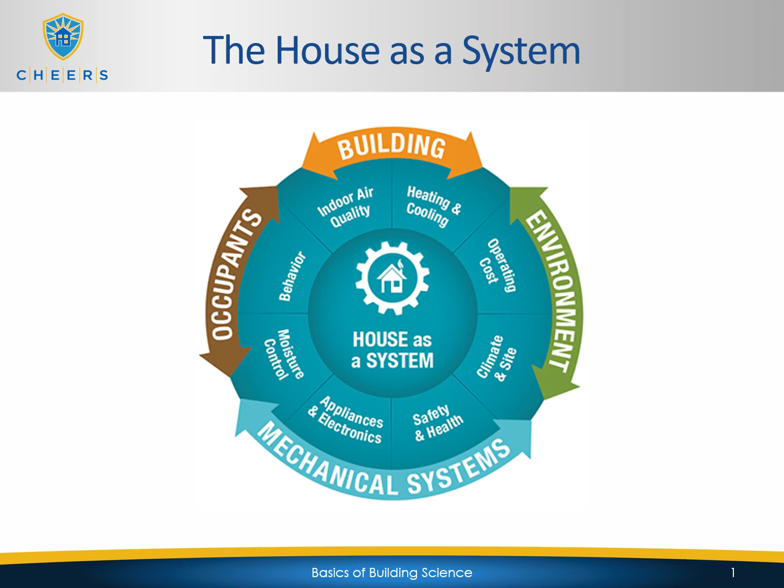And now we'll be covering the house as a system. So what is a system? A system is a set of interacting or interdependent components forming an integrated whole.

A system has three things. It has a structure, which contains parts or components that are directly or indirectly related to each other. It has a behavior, which contains processes that transform inputs into outputs. So in our particular scenario, for example, energy, right? And they have interconnectivity. So the parts and processes are connected by structural and/or behavioral relationships.

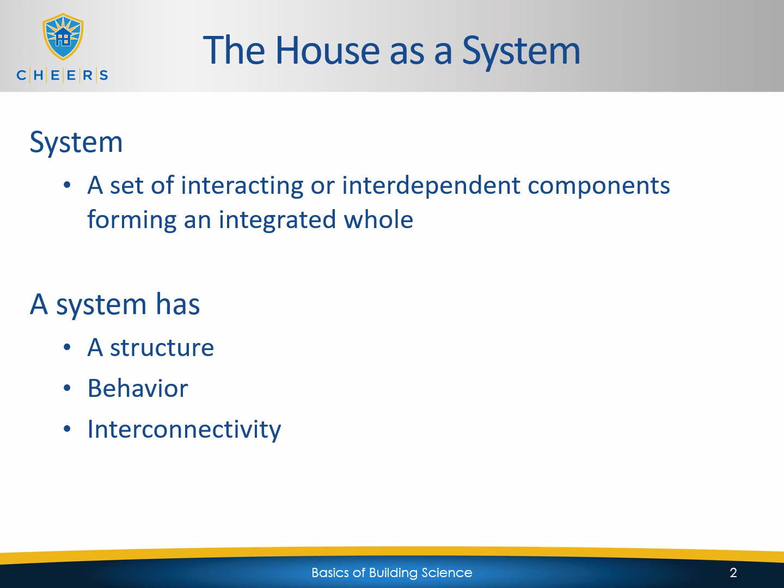So basically, each building component in a house interacts in some way with the other building components within that particular structure. So what are the building components of the house? We have the building envelope, space conditioning, lighting and appliances, mechanical ventilation, water heating and distribution, and obviously the occupants as well. Homeowner behavior will interact differently with the other components of the house and how they were built.

So the house is a system made up of interdependent parts, which I just listed a second ago. The operation of one part affects many others. So for example, the insulation and the quality of the insulation will affect how the air conditioning system works. Poor insulation will make the system work harder, for example, right? That's a very easy example. When all parts work together, the house is comfortable, safe, efficient, and durable. A house will experience problems when its components do not work in unison.

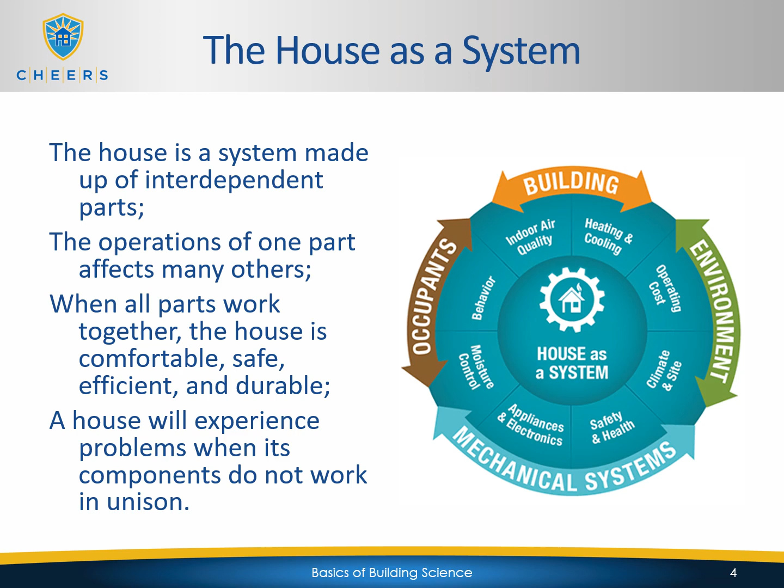So the problems that can arise from components in a house that don't work properly together can range from just high energy bills. They can result in inefficiency, discomfort, and in some scenarios can also produce life-threatening scenarios, which we'll talk about in a minute. So for example, let's talk about some interconnectivity issues, right? An attic without insulation makes the heating and cooling system work harder than necessary. This will decrease the HVAC equipment's life and cause higher than necessary energy bills.

So let's say in the winter you're heating up your house and there is no insulation in the attic. That hot air will just rise up and leak out, right? It will transfer right out. So your heating system will work probably twice as hard as it should. Therefore, your energy bill is going to be higher. The life of your equipment is not going to be as long as it should because it's going to be working much harder than it's supposed to. So that's an example of two systems not working properly together.

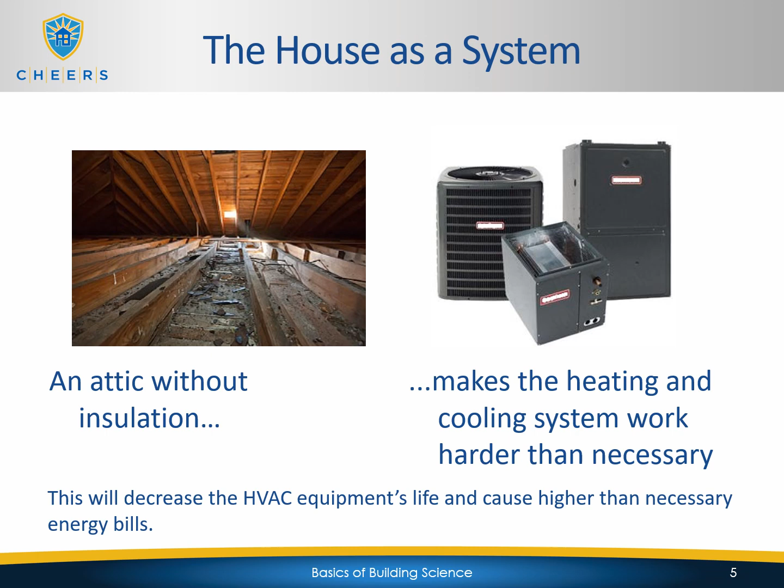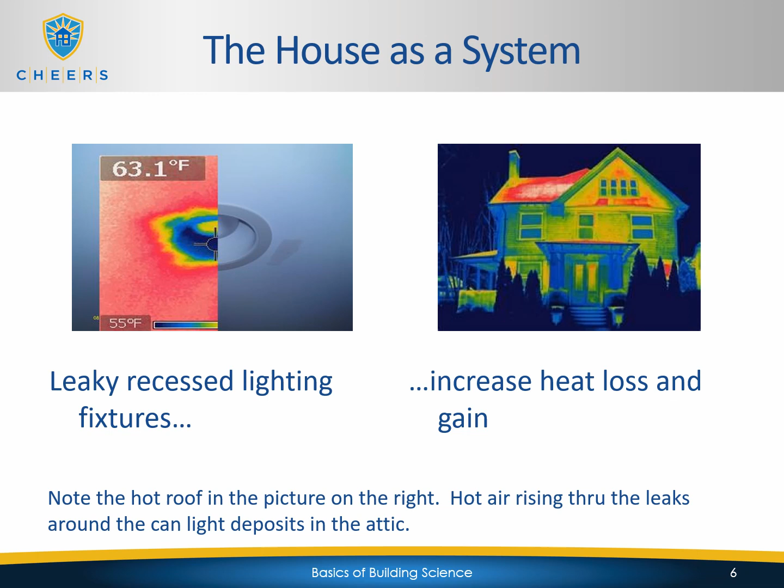This is an example of mechanical ventilation not exhausting properly to the outdoors, which can cause moisture damage to the roof deck and trusses. Moisture in this particular case will deposit and condense on the underside of the roof, causing it to rot over time. So basically, any kind of mechanical ventilation exhausting from the house needs to exhaust completely outside of the structure, not just into the attic.

So in this particular scenario, you have mechanical ventilation that's exhausting hot air from the inside of the house. Now think of the fact that the attic is going to be colder, right? So as hot air reaches the cold attic, it's going to condense and moisture is going to form in the area around that vent in the attic. And that moisture eventually is going to be absorbed by the building materials, and it's going to create rot and moisture problems down the line.

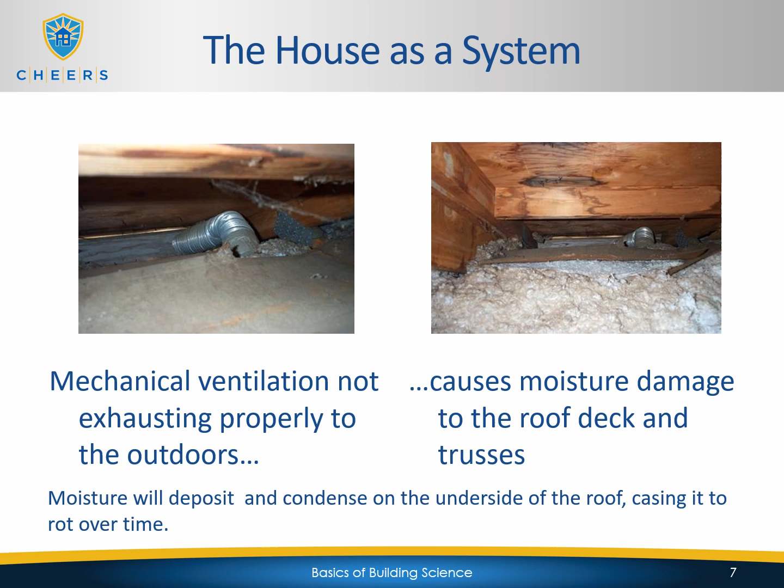So those are just examples, but basically everything in the house interacts with one another. So you can't insulate unless you air seal, right? Because air sealing is basically the pressure boundary, insulation is the thermal boundary, like we mentioned earlier. If you insulate without air sealing, you don't have the pressure boundary and thermal boundary connection, so you cannot do one without the other. You can't air seal unless you insulate.

If you stop the pressure boundary but you don't put a thermal boundary in there, now you stopped air movement, but you're not going to stop heat flow, right? You can't air seal unless you have combustion air. Combustion air is basically the air necessary for a combustion appliance to burn properly.

If you air seal but don't provide any kind of makeup air, your combustion appliances are not going to work properly, and they're going to create CO, which is a dangerous chemical, which we'll talk about in a sec. And then you have to test for combustion after you air seal.

So every time you air seal a house and you basically tighten it up, the pressure boundary of the house is now much tighter. There's the potential of a dangerous situation being created with your combustion appliances. So it's important that you test for combustion air after air sealing. So basically you have to make sure that there's enough makeup air for those combustion appliances to work properly.

Now, as you can see, everything works with one another. You cannot do each one of these things independently. You have to take everything else into account. If you don't, again, you might have energy problems, you might have comfort problems, you might create actual damage to your structure due to moisture and so forth, or you could create dangerous situations just like the production of CO, which can kill you.

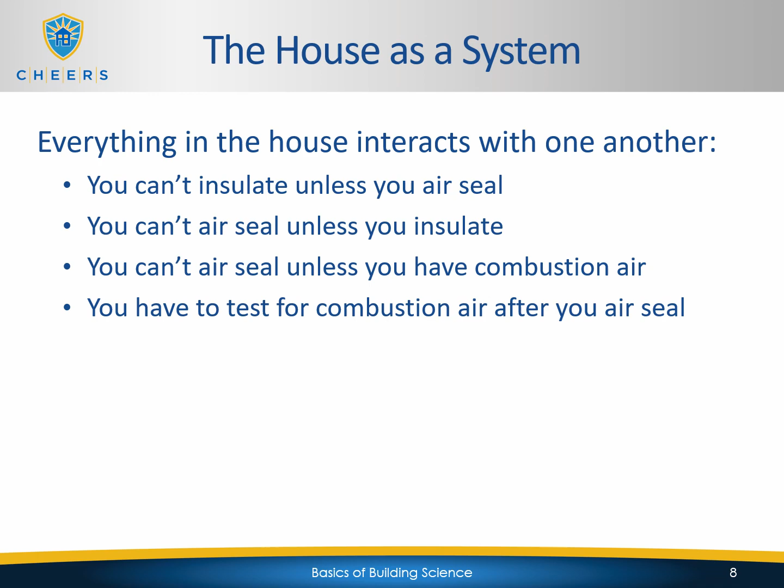So like I said, when the house does not work as a system, problems will occur. Insulating and venting the attic without air sealing could damage the roof, like we mentioned. Air sealing without insulation could cause moisture problems. Air sealing and insulating without attention to the HVAC ducts will not reduce duct leakage. So for example, you air seal and insulate your walls, but now your ducts are still leaking like a sieve. Obviously, that's still going to be very inefficient.

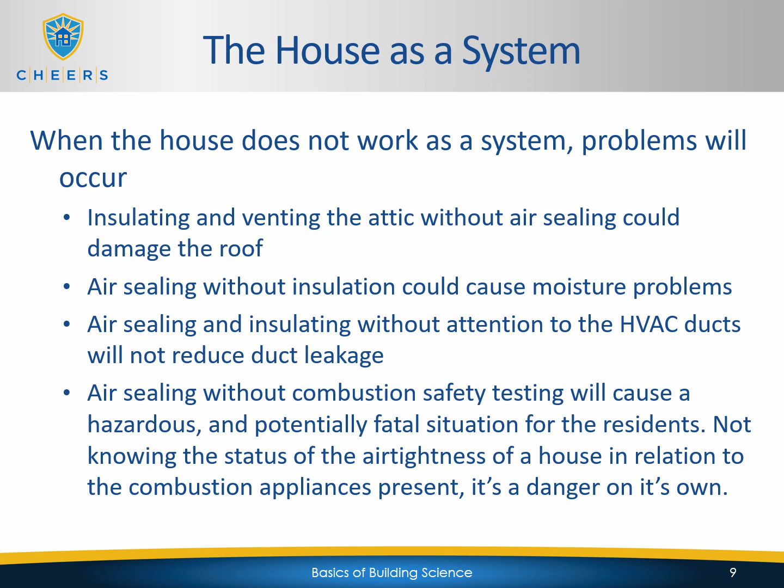And then air sealing without combustion safety testing will cause a hazardous and potentially fatal situation for the residents. Not knowing the status of the air tightness of the house in relation to the combustion appliances present is a danger on its own. So it's not necessarily that it's going to happen, but the reality is that it might happen. And not knowing whether it does or not is dangerous on its own. Anytime you air seal, you absolutely should test the house to make sure that the combustion appliances are working properly with the new air sealing.

And these are additional examples. So insulating and venting an attic without air sealing could cause moisture damage on the roof. So if you're not air sealing, it means that you're stopping heat transfer, but not air movement. So the hot air rising from the house will condense and potentially freeze on the underside of the roof, causing damage to the roof and allow moisture to fall back on the insulation and below.

So you have hot air that rises in the attic. Once it touches the cold roof deck, it condenses. Once it condenses, it might freeze depending on the temperature on the outside. Eventually, it'll melt. It'll cause damage to the roof deck, plus the moisture will fall back on the insulation. So it's a chain reaction effect that can cause multiple problems.

Also, keep in mind that the problems that you may encounter vary from climate zone to climate zone. So the problems you're going to encounter in a hot climate zone are going to be different than the problems you encounter in a cold climate zone.

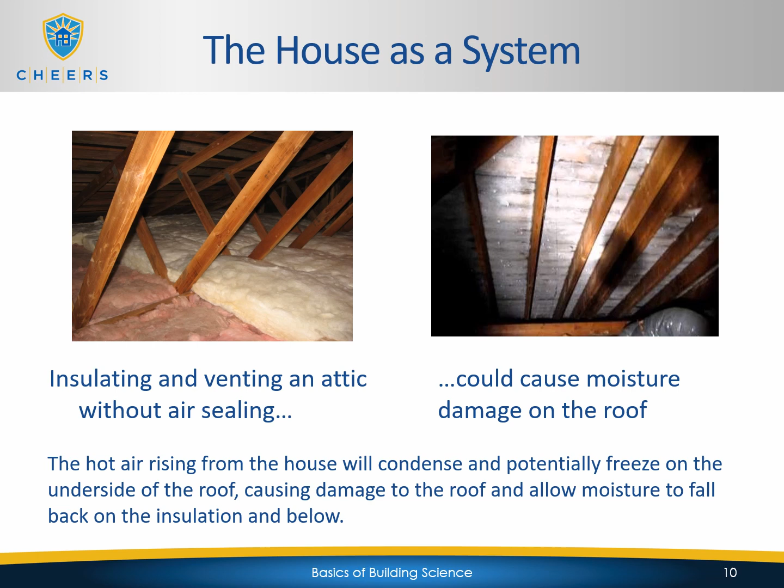So another example, air sealing without insulating could cause moisture damage. So heat transfer will cause condensation to build within the walls once the outside air touches the inside surface, or vice versa, thus causing moisture to form in the wall cavity or on the walls. So basically, you have a wall that's properly sealed for air movement, but there is no insulation in there. So you're still going to have heat transfer coming in from the outside or the inside, depending on what's going on.

And because there is nowhere for that air to go, because it's sealed, that air is going to be trapped within the cavity. And due to the temperature differences, it might condense. If it condenses and becomes actual moisture, then at that point it'll deposit on the inside of the walls and start causing moisture problems from the inside out. And as you can see here, it's an example of a wall that's rotting, and there was moisture being built, could be from the inside, due to that.

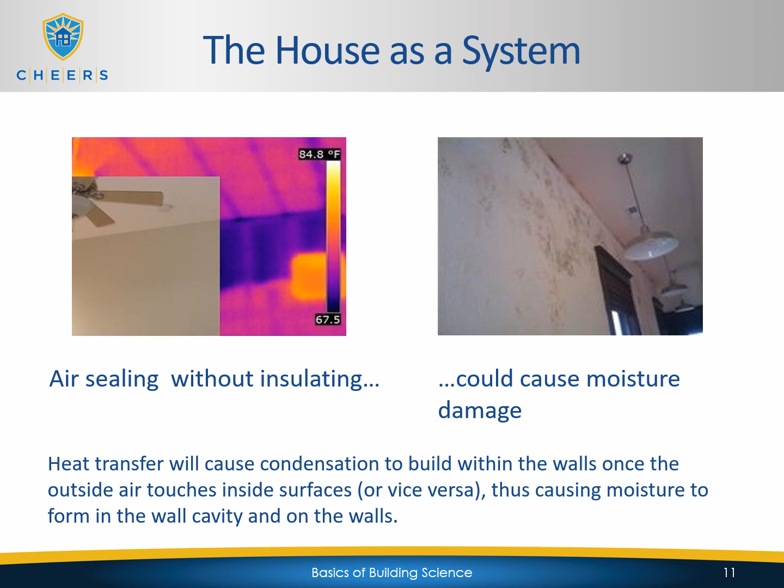Air sealing and insulating without attention to the HVAC will not reduce duct leakage. So obviously improving the thermal and pressure boundaries of a home will not solve the energy loss associated with the leakage of the HVAC ducts and the moisture problems associated with it. So again, you could have a perfectly built house on the outside as far as the walls, ceiling, raised floor, and then you have an air conditioning system that's leaking completely.

And basically if it's leaking, it's going to be sucking air in or out from the outside of the home, because that's where the ducts most likely will be. So you've got to also pay attention to the duct sealing on top of that.

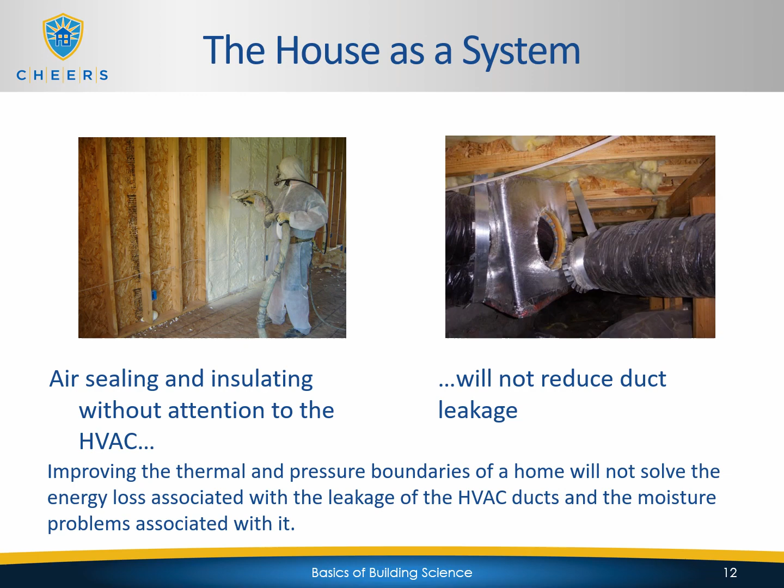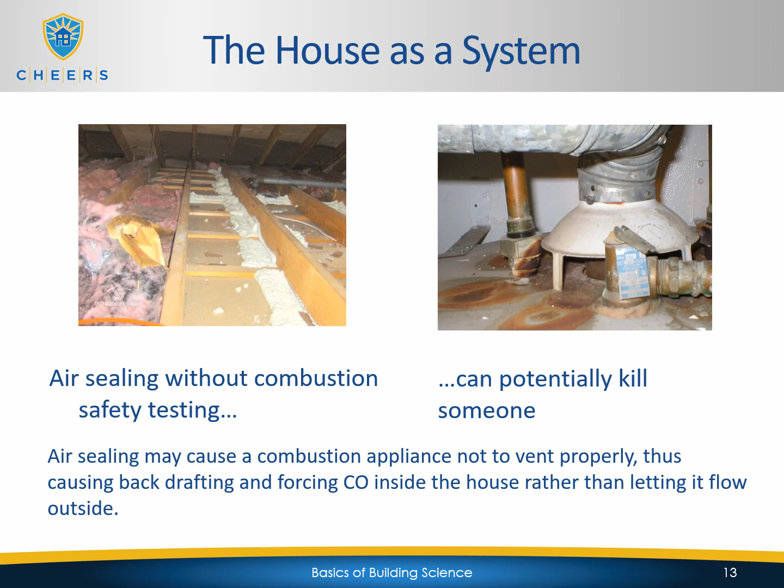Air sealing without combustion safety testing can potentially kill somebody. So like I mentioned earlier, air sealing may cause combustion appliances not to vent properly, thus causing backdrafting and forcing CO inside the house rather than letting it flow outside. CO is a very dangerous chemical and it can kill somebody.

So that's what CO is. It's a colorless, odorless, tasteless gas. It's highly toxic. It's a byproduct of improper combustion. So if combustion appliances don't have enough oxygen to breathe properly, they produce CO. And CO can cause a range of symptoms depending on exposure levels, anywhere from a headache all the way to death. So if there's CO exposure within the home, a lot of the low level exposures of CO are actually flu-like symptoms. Now you cannot smell CO, you cannot see CO, you cannot taste CO.

So a lot of times you might be in a dangerous situation where you think that you might just have a flu or you just don't feel good, but the reality is that you're breathing in CO because your home is not performing properly. So if the house is very airtight and there is nowhere for CO to draft out, or it's being drafted inside because mechanical ventilation is sucking it in from the appliance, that can cause very dangerous situations.

If you read the news or if you do research, you'll see that around the winter seasons, thousands of people die yearly from CO exposure. It's a very common thing to happen, and it's something that you definitely have to be aware of when performing modifications to the house.

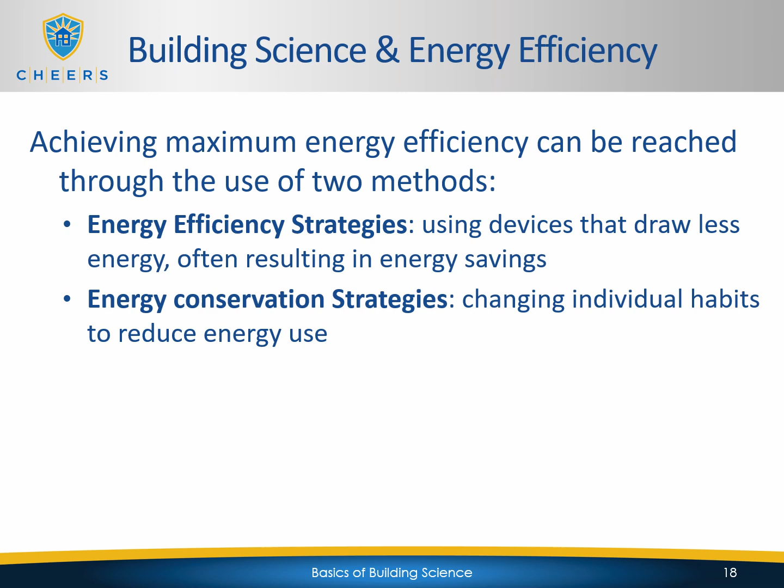So how does building science relate to actual human comfort? Now, there are different factors that determine personal comfort. You have air temperature, you have relative humidity, you have air movement, you have mean radiant temperature, and then you also have the individual itself.

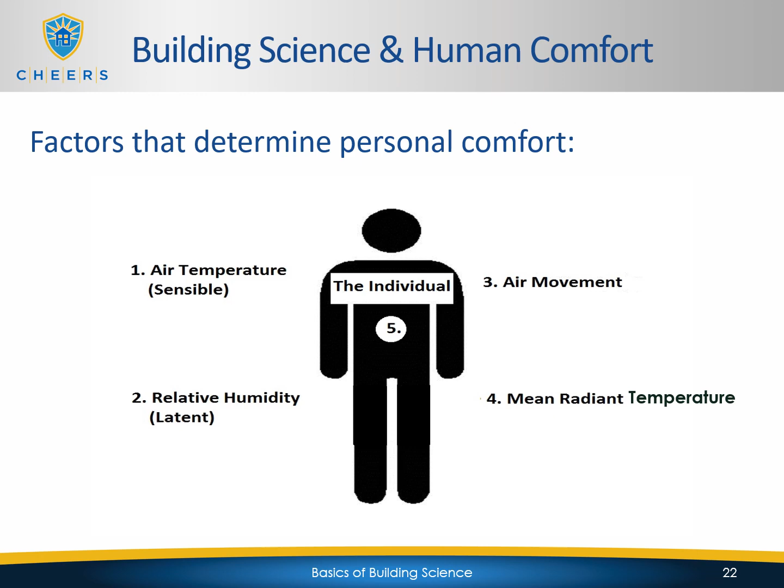Now, we mentioned a second ago air temperature, and I mentioned relative humidity. So those are examples of sensible and latent heat. So what do they mean? Heat obviously has to do with personal comfort. It's a big factor in it. So sensible heat is heat that causes a change in temperature in an object. So that's a very easy example of air temperature, right? Latent heat is heat that causes a change of state, like solid to liquid or liquid to vapor, with no actual change in temperature. So relative humidity is an example of latent heat.

So we talked about air temperature. Basically, it's very easy to measure with a thermometer, for example, right? It's the measure of how hot or cold the air is. It describes the kinetic energy of the gases that make up air. And as the temperature increases, air molecules move more quickly. As it decreases, they slow down. Hence, they turn into a vapor or they condense down to moisture and then down to a liquid.

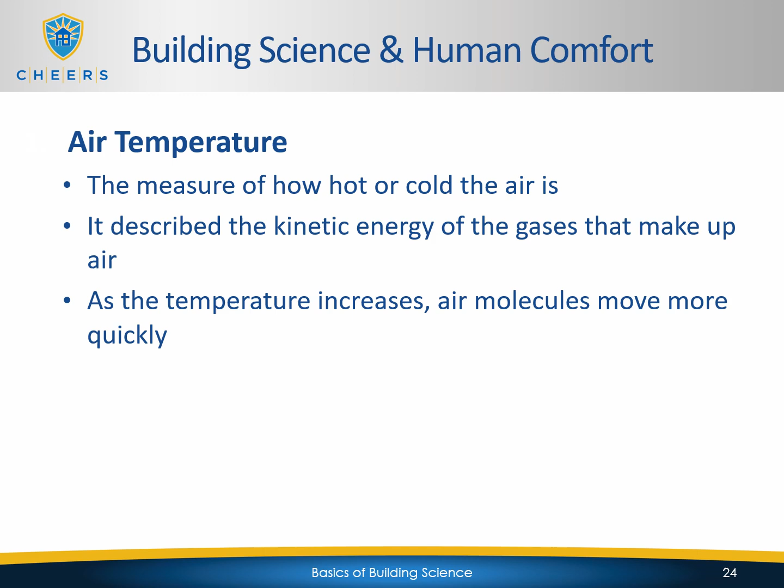Now, relative humidity is the ratio of the amount of water in the air relative to the amount of water that air can hold at its current temperature. So warm air can carry more moisture than cold air because it becomes less dense when heated. As it becomes less dense, the molecules expand, hence allowing it to hold more moisture. So 100% relative humidity is completely saturated air. At 100% relative humidity, it's basically raining, right? Healthy levels are between 40 and 60%.

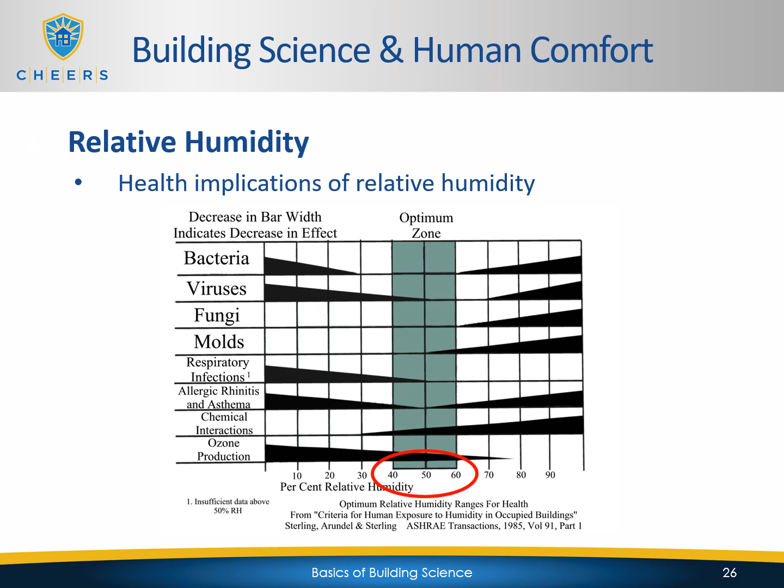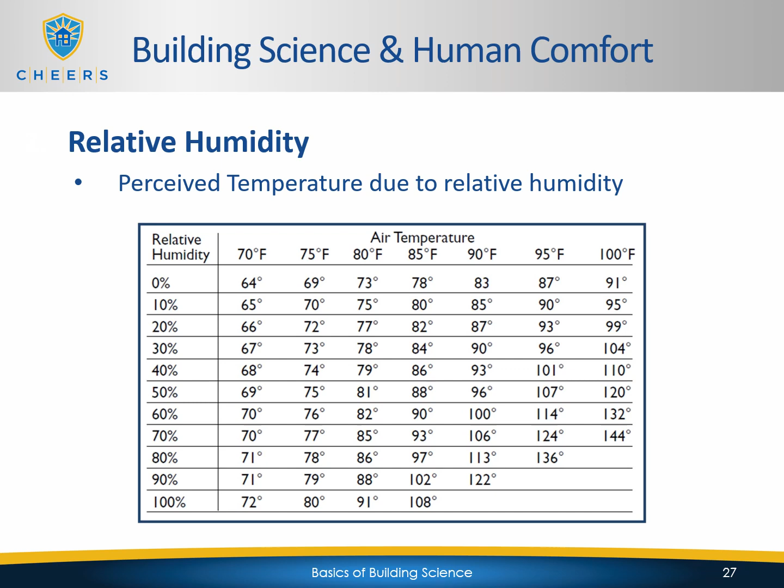So air movement can increase heat loss without any change in actual temperature. So it does increase personal convective heat losses. If the air temperature is less than the skin temperature, it will significantly increase those convective losses. This occurs because more air is coming in contact with the warm skin as it blows past.

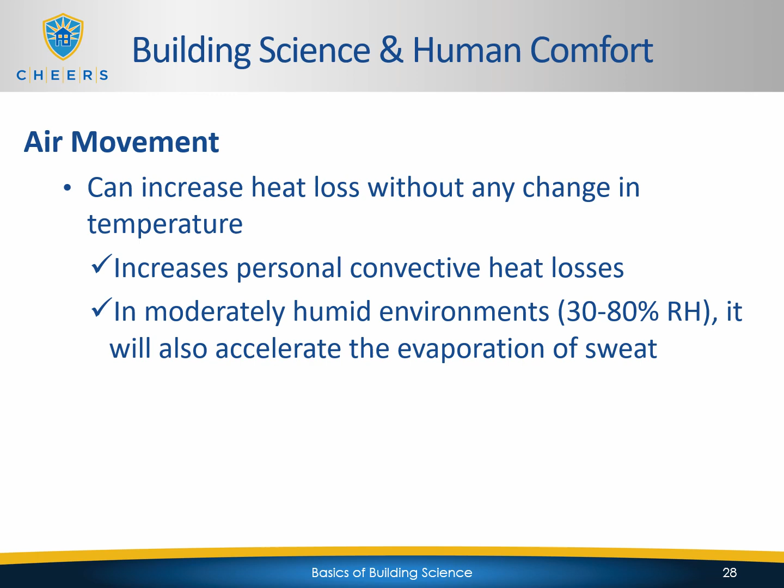Now, mean radiant temperature is the measure of the average temperature of all the objects in a space, including the walls, windows, furniture, and people. It's critical to human comfort because our bodies radiate heat toward cold surrounding surfaces and receive heat from hot surrounding surfaces. About a 1 degree change in mean radiant temperature is approximately equal to a 1.5 degree change in air temperature. So our surroundings affect our comfort level.

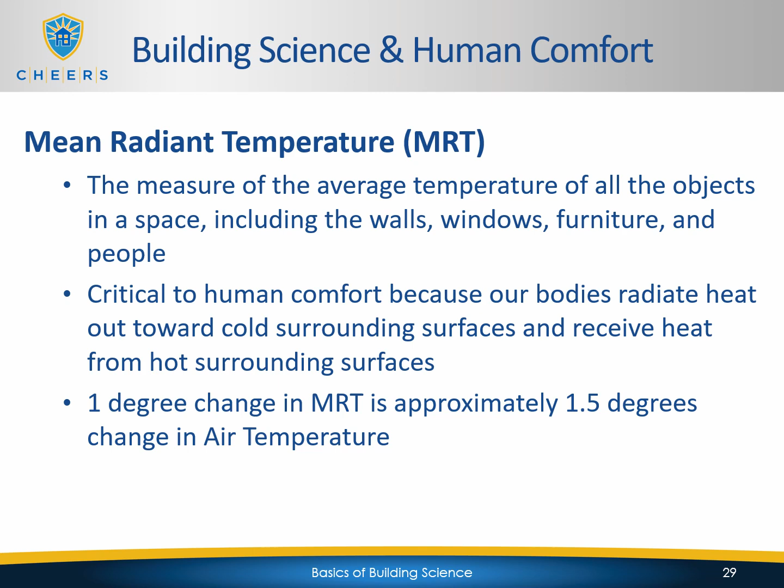And then, of course, the individual. The individual will have an effect on their own comfort based on their physical condition, level of activity, lifestyle, age, metabolism, acclimation, and gender. So basically, any of these items will affect the comfort of the individual independently from everything else that we just talked about. Everything else could be proper, but these factors will additionally change the comfort of the person.